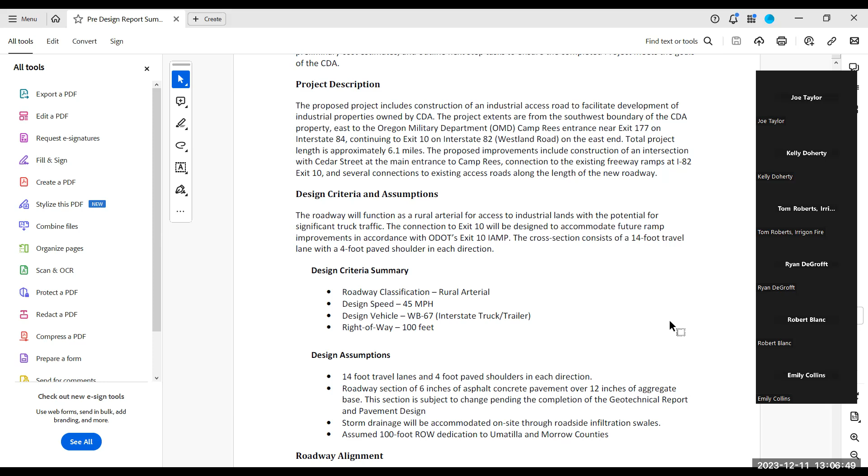We have, as Greg mentioned, designed this road project to be in phases to present to you as a point of making a decision. I think the 10% design, we have been having a weekly meeting with Anderson Perry. They've done a good job of coming very quickly with the answer that we were looking for. We have sent that all to all of you. I think Debbie sent it to you this morning. So you have it in your hand. If you don't have it, we will make sure you get it with the map and so on.

The 10% design, again, these are high level design discussion. The idea was design, Anderson Perry will design this for 100%. So by the time we get done with the design, it will be the whole 6.1 miles covered as part of the design.

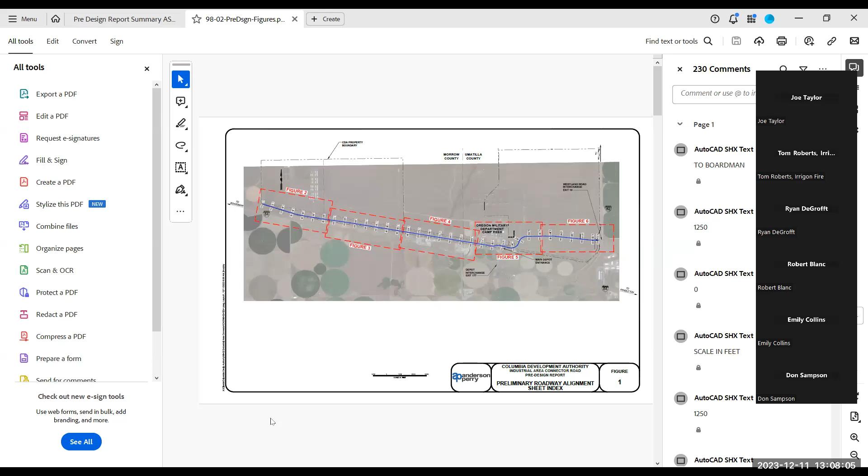The numbers that are in front of you show how much we can do as part of the 7 million. We broke it down. They did a good job of breaking it down for you to make that decision. How much the 7 million will buy, and where the remainder of funding will come from to finish it up. But as far as the design, it will be the entire road all the way to the west end.

So with that, I'll turn it over to Andy, I believe, or to Andy Lindsey, and also Brad Baird will go quickly over the numbers.

Just very quickly, Fred, from what I can see being presented on our screen, we have 7 million, and the initial cost estimate as of 2024, with no bids having gone out or anything, is 14 million and some change. That's correct. This is, again, 10% is extremely high level. These numbers will be adjusted once we get to 30 and 60%. Future, as far as inflation and some of the costs are coming down, we may be able to reduce that, but these are not bid numbers, no.

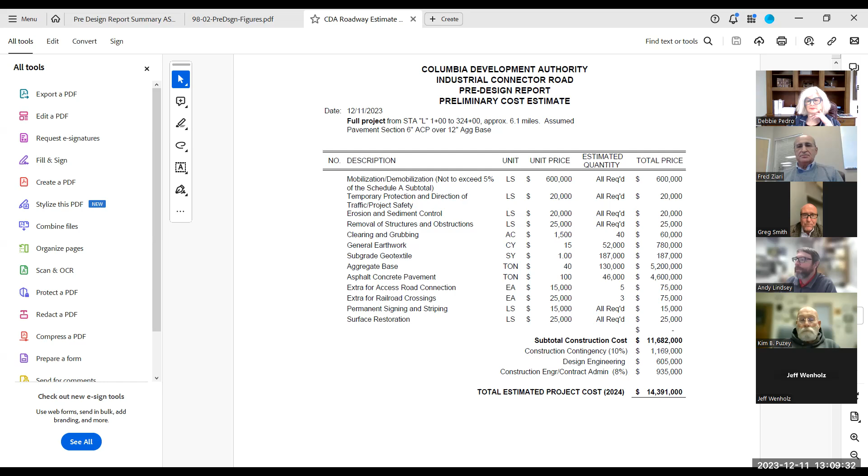Thank you so much. Hey, thanks for the introduction, Fred. I'm Andy Lindsey with Anderson Perry and been doing most of the design work on here. I may just share my screen if that's okay, so I can just kind of drive the picture a little bit. Let's see.

Did that figure pop up there? Can you guys see that? Yep. Yes. Perfect. So this is kind of the overall big picture view of the alignment of the property.

And again, as Fred said, our directive has been to design to 100% the entire length of the project, the full project. And then obviously we know the current budget doesn't support construction of the full project, but we've sort of broken that out into a couple different sections with some options for you guys to choose from. So I think part of the other document that you saw is kind of this pre-design summary. This is not the full report. This is just kind of a summary of what we'll put together in a full report for you.

This goes through the project description, some of our design criteria, and assumptions. We'll get to that in a minute. I think it's easiest if we start with the alignment, since that's the bulk of it. I expect there'll be more discussion around the cost part, so maybe we save that till the end.

This is the overall view of the layout. Here's the Camp Rees facility, the interchange at exit 177, and exit 10 on the I-82 side.

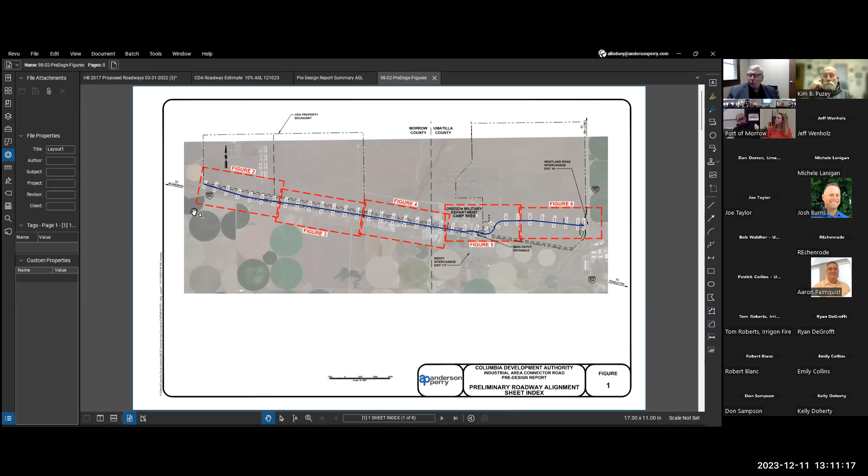We'll start going through these figures on the very west end of the property. There's an existing access road that goes this whole length, so starting on that west end, we'll try to keep the alignment along that existing road as much as we can, abutting it up to the property line and the railroad line as close as we can.

You'll see in some cases, like here and a couple other spots, that property line jogs in and out just a little bit. We obviously don't want to be zigzagging the road all over the place, so we may be further away from the property line in some cases rather than others.

Along this alignment there are several existing access roads we'll want to tie into. There's the Western Patrol Road at the end, and along the boundary between the unrestricted and restricted parcels there's A Avenue, which is a connection we want to tie into. There are also, I think, three or four existing or old railroad crossings.

There are a lot of railroad lines on the site. Currently, some of these have just been paved over—it looks like the rails are still there, but they've been paved over. We'd suggest restoring those crossings so they're functional, keeping the rails in place. They may need to be updated at some point in the future if they were ever used, but it makes sense at this point to plan on keeping those crossings intact.

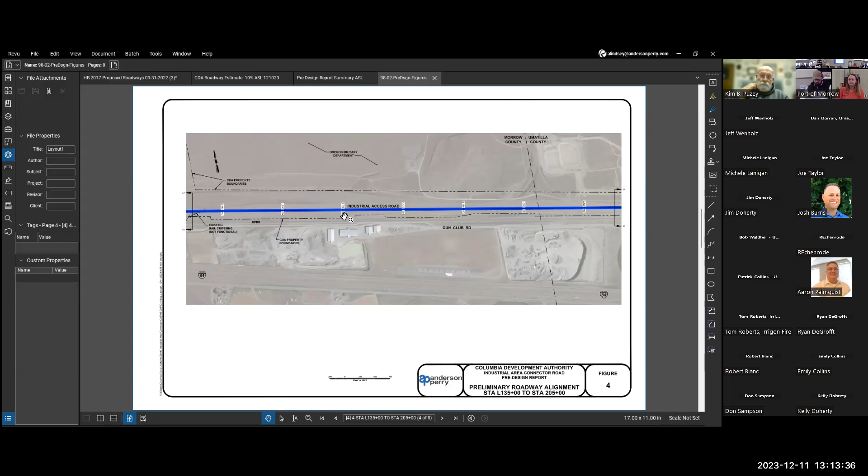Here you can see this jogs quite a bit. We'll try as much as we can—and we'll have a better feel for this once we get our topographic survey and field data completed and get further into the design, as far as profiles and alignments—to stay mostly on that existing roadway alignment.

Further to the east, here's the main entrance to the OMD facility, and you can see here's the underpass. We need to jog up to the north to get away from that underpass to create the intersection with what is called Cedar Street, which is the main entrance to the OMD parcel.

Once we get beyond that, we'll jog up to the north. There's capability for this property, on both the south and north side of that access road, to be developed—that's why we jog north a little there. We identified a future CDA access road to go to the north here, and potentially a future access for the OMD here, so it may make sense to design and plan for a future access road there.

Not that that would be done immediately, but it's just looking at things that might be beneficial for the future to consider.

Down finally to the far eastern end, we'll tie into exit 10 on the Westland Road interchange off of I-82. What you see here in the darker shading is a future design for those off-ramp improvements that ODOT has identified in their interchange area management plan.

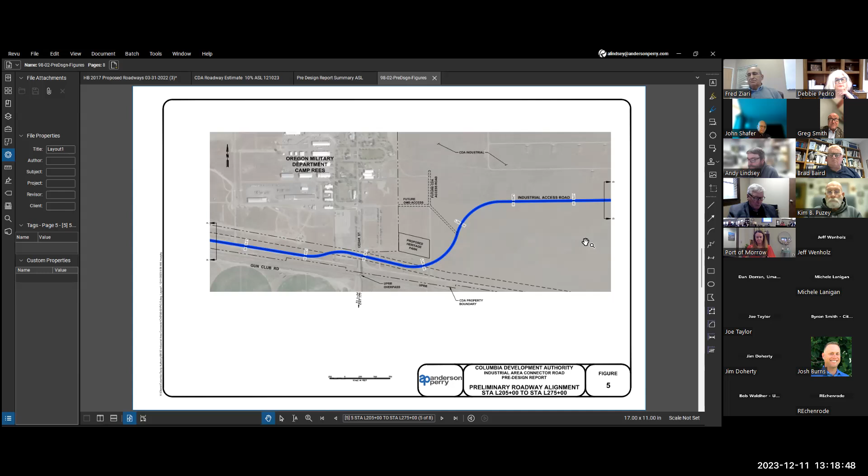Other design assumptions—some of these are somewhat flexible and will be fleshed out more as we get into further detail. We've assumed a pavement section of 12 inches of aggregate, 6 inches of asphalt. As we complete more work and finish our geotech investigation and pavement design report, those things will help us narrow that down, whether it's too much or not enough, which can affect cost estimates as we move forward.

For travel lane width, we're proposing 2 travel lanes, one in each direction, at 14 feet wide, a bit wider than normal standards. But I think in the industrial setting those wider lanes help out with access in and out of future access roads and make it easier for larger vehicles to navigate.

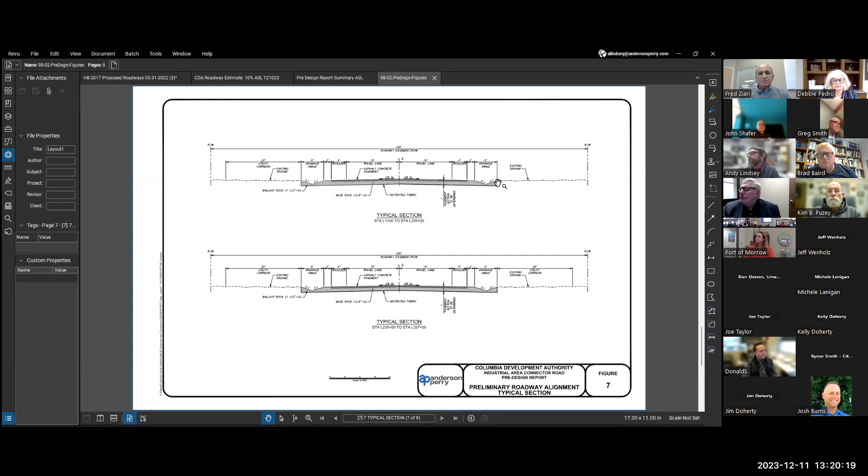One thing I wanted to point out—this shows the typical section we talked about: 14-foot travel lanes, 4-foot shoulders. We're assuming stormwater will be handled by roadside drainage swales, and once we finish our geotechnical report, that will help inform and confirm those decisions as well.

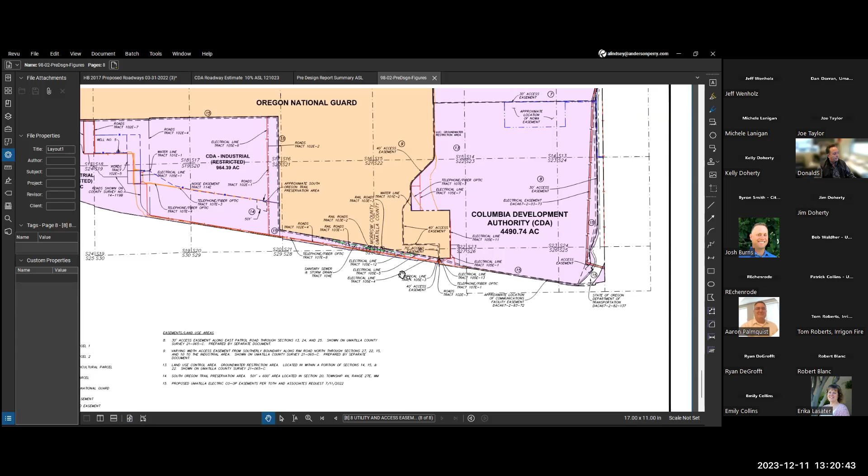This map is a little hard to see, but I wanted to show that there are a lot of existing utilities along this alignment—you can see power lines, telephone lines, fiber lines, and other access easements. For example, here's the access easement for the tribes, and there are electric utility lines there. We'll need to accommodate those, and they'll all be shown on the drawings as we further our design and get into more detail.

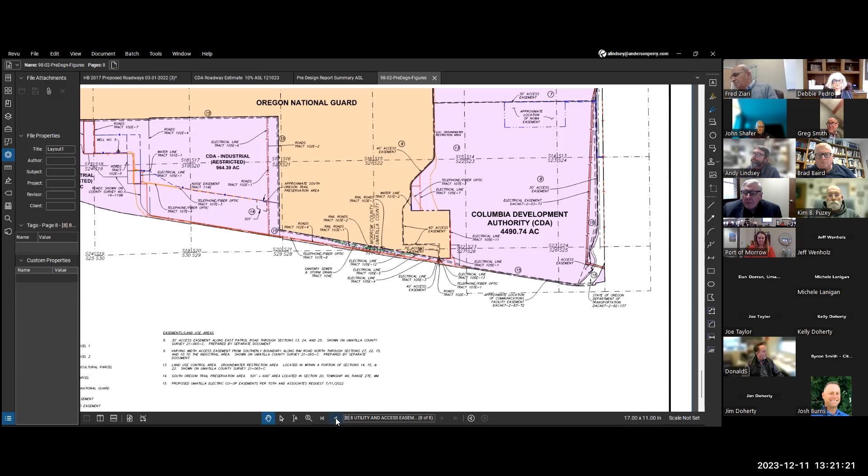We will accommodate future utilities—water, sewer, telephone, power, gas. Here you can see a 20-foot utility corridor on the west end of the project where we're abutted up against the property line, on the north side where you could access the properties. Once we get past the main entrance and up to the north, where there could be potential development on both sides, we'll show a utility corridor on both sides of the roadway, out of the pavement area, so future utilities can be installed without disturbing the pavement.

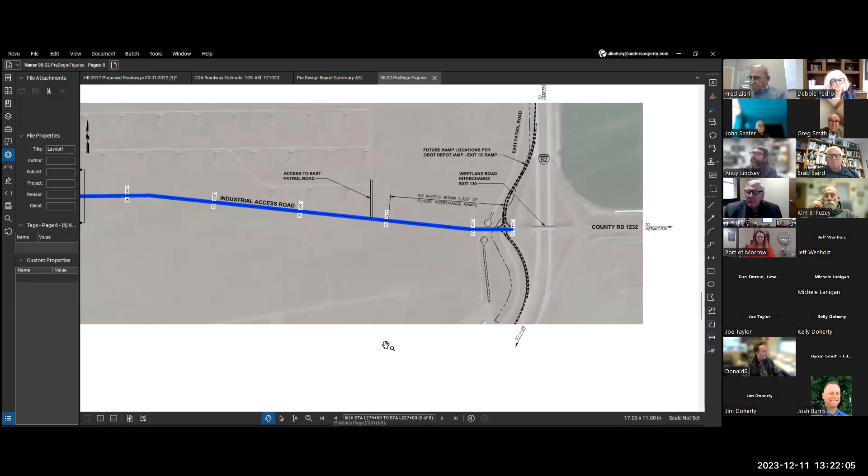We probably do want to identify some future utility crossing locations along this section where there could be development on both sides—perhaps at this access location, at some predetermined interval that we can flesh out as we get further along the line. So those would be accommodated.

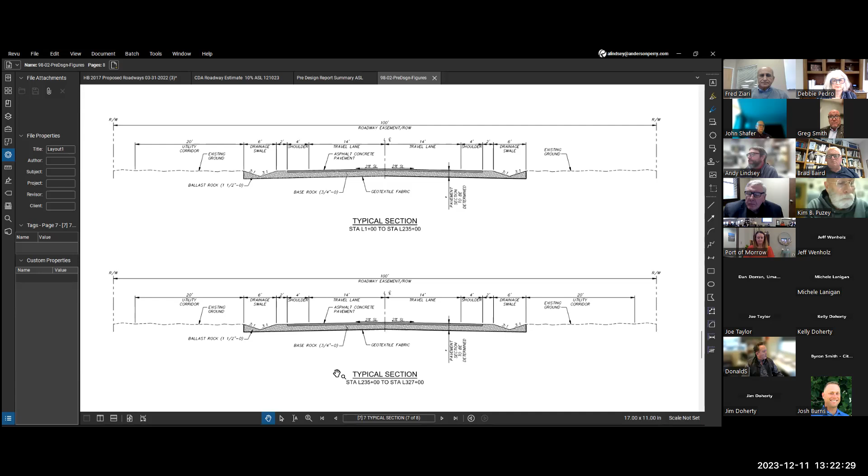That's the bulk of the information on the alignment part. Again, I think it's pretty similar to what you guys have seen before as far as the conceptual items, a little bit of massaging here and there. And again, that'll continue to get refined to make it as efficient as possible.

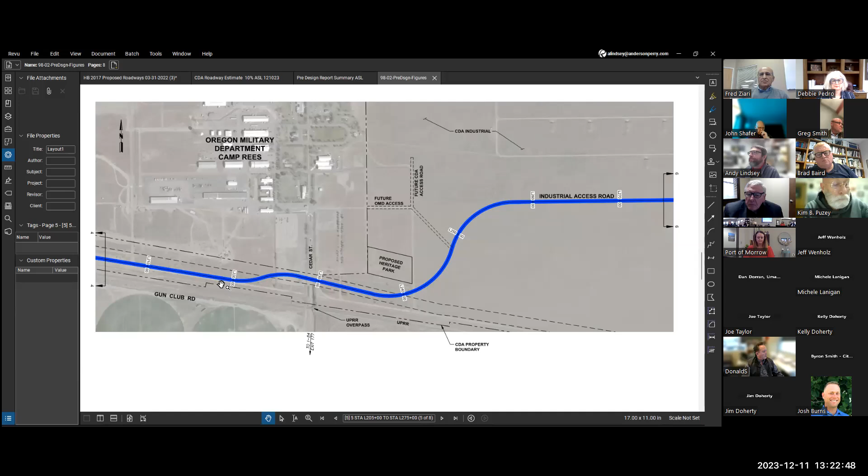So jump over to here and we'll get into the fun, or not so fun, part of it: the cost estimates. What we've done is prepared an overall cost estimate for the full length of the project. You saw that earlier, around 14.4 million. That's from the west end all the way to the east end, everything. Obviously that's well outside the $7 million budget.

So what we've done is identified what we've called the base project, and then several different additives that you could add on to. What we're considering the base project is basically from the main entrance of OMD east to exit 10 on Highway 82. That gets you connected to the freeway on both ends, and provides development opportunities on both sides of the roadway through that section. That base section, our cost estimate is about $5 million.

And again, this is a summary. We've got these all broken out in other spreadsheets if you care to dive into the details of those.

The first additive would be starting there and going west, incrementally working your way that direction as money allows. That first additive is basically from the main entrance west to the county line. That's another 1.5 million, which would bring the total cost to 6.5.